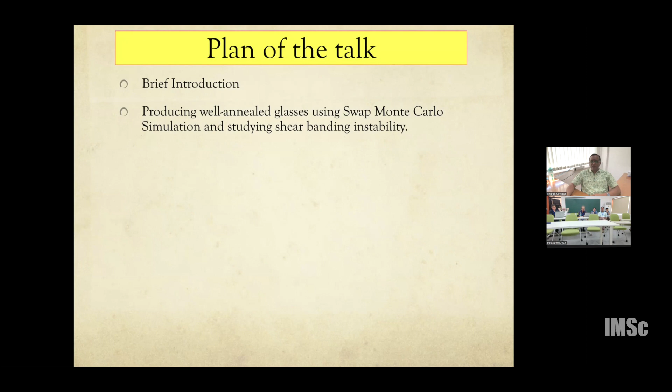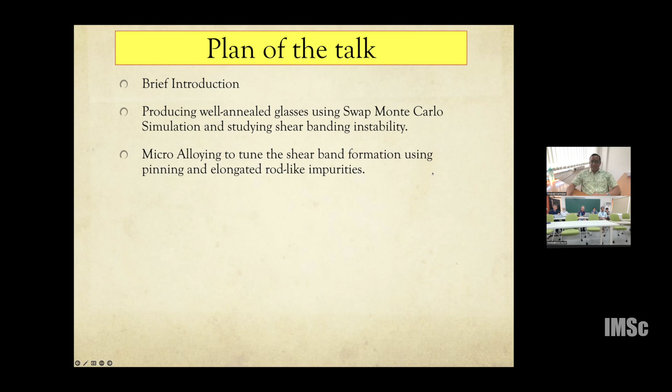I am going to talk briefly about how to produce very well annealed glasses using something called swap Monte Carlo methods, and then talk about shear bands. Next I will discuss how to tune shear bands using microalloying and impurity particles. Then I will talk briefly again about annealing glasses using cyclic shear and what kind of effects it has on yielding processes. The fourth one is along the same line, but using a slightly different technique, a run and tumble active particle. And I will show it has a striking similarity with cyclic shear.

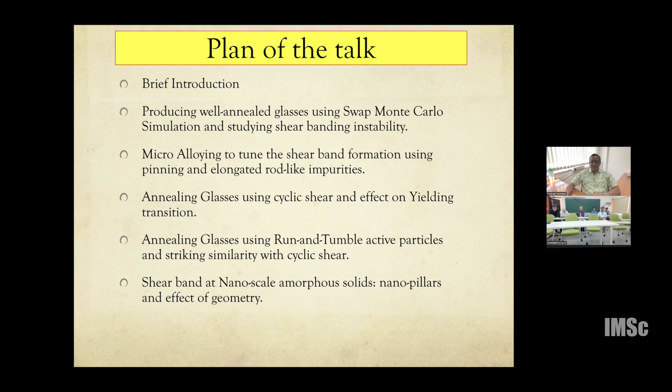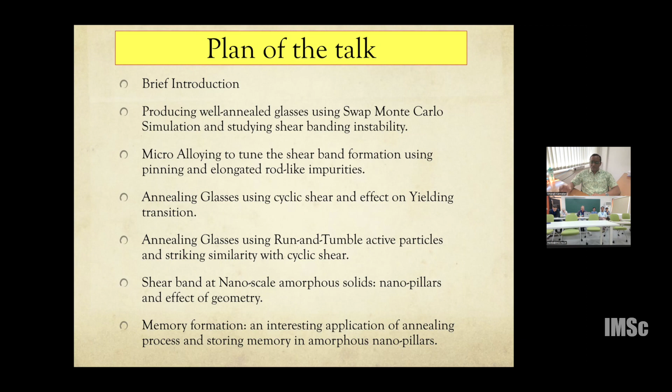And if I have time, then I will go into shear bands at nanoscales, particularly in nanopillars, and talk about how geometry affects them. And again, if I have time, I'll briefly talk about memory formation and how a nanopillar can actually store information. I probably don't have to show you these slides, because I'm sure you have seen them in multiple locations.

But just to briefly tell you that these glasses are there in our everyday life, particularly metallic glass, emulsions, colloids, in paints, ketchup, glaciers, and makeup materials. But what is more interesting nowadays is the use of these materials at small scales, particularly at nanoscale, because of easy processing. At small scales, these materials turn out to be very useful for fabricating various nano devices. And recently there is this micro fuel cell where bulk metallic glass pillars are used, because these pillars have a large surface area, and the catalysis can be significantly large.

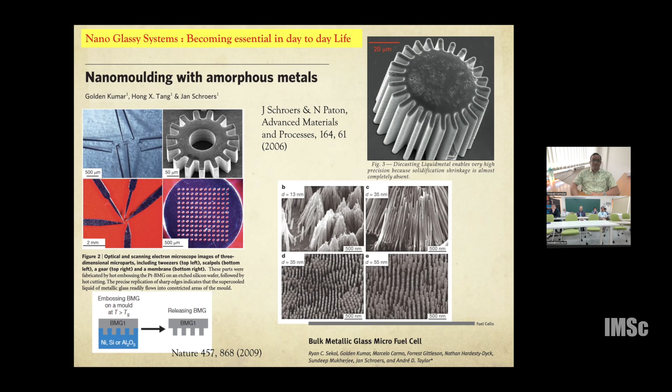But the question that remains is, when you go to such a small scale, do your mechanical properties remain very similar to your bulk, or are there significant changes with size reduction? I'll briefly discuss that aspect and show how geometry plays an important role at small scale. I don't have to really tell you that glasses are one of the strongest materials one can obtain, but they have this major problem of catastrophic failure, known in the physics literature as yielding transitions. Even though we can make very strong materials using glasses and various alloys, how to stop their catastrophic failure is a subject of long debate.

There are also interesting aspects, for example, recently where you try to have a window to see through what is going on in a nuclear reactor. Last December, I went to a center in Kolkata called CGCRI, Central Glass and Ceramic Research Institute, where I saw how they make glasses called radiation sealed windows for nuclear reactors. It's fascinating that glass is one of the best options to seal the radiation and store nuclear waste safely. So there is significant interest in that direction. But there also one needs to understand how to stop such fracture processes, because they will be under extreme conditions.

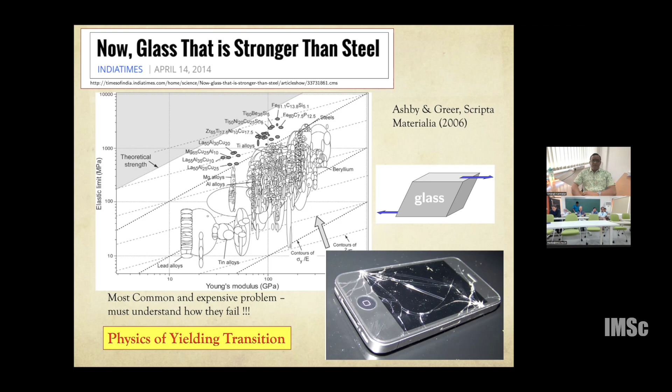Well, why is the problem so hard? I am giving a physicist's perspective. When you try to understand yielding and deformation in crystals, they are controlled by defects. If you study defect dynamics, that can be a good tool to understand crystal plasticity. But in amorphous solids, as the whole structure is disordered, it's very hard to define what a defect is, and then identify and study defect dynamics.

But recently there has been significant progress in that direction, and it is sometimes believed that these SLV structures, which are basically quadrupoles, appear when you apply various types of deformation, be it simple shear, uniaxial or even uniform expansion. But it's not so easy to talk about these objects as non-interacting defects and write down dynamics on them. So there are attempts, and one of them is the famous work on shear transformation zone theory by Langer and co-workers.

And so there is significant progress made along that line, which suggests that these SLVs, if they line up, then they basically produce shear bands, and that leads to crack formations. And it has been shown via energy considerations that SLVs lining up is an energy minimized configuration. This is the work done by one of my collaborators from IIT Bombay, Ratul Dasgupta, with Itamar Procaccia, my former postdoc advisor.

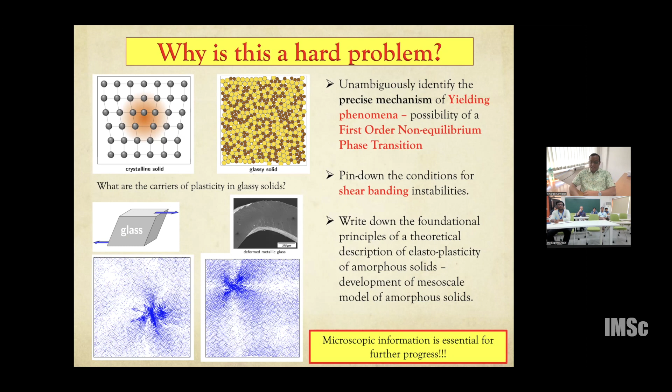And so what is stopping us from getting a very detailed microscopic understanding of this phenomenon is the lack of access to very low energy glassy states. For example, in molecular glasses, you can get a glassy state which is accessible in experiment, where the viscosity can be 10 to the 12 or 13. But you do not get the microscopic details of the arrangements of atoms and their structural information. So some of these can be bypassed if you do experiment, because there you can actually do video microscopy and track individual particles.

But the difficulty comes when you try to access a very large window of relaxation time or viscosity. So in colloidal experiments, the largest viscosity change that you can study is of order 10 to the 4 to 10 to the 5. And when you come to simulations, there also the biggest difficulty is the time scale. So the largest change in viscosity that one can study, if you push it a little bit more, can be 10 to the 5 to 6. So these are very similar to what you can achieve in colloidal experiments.

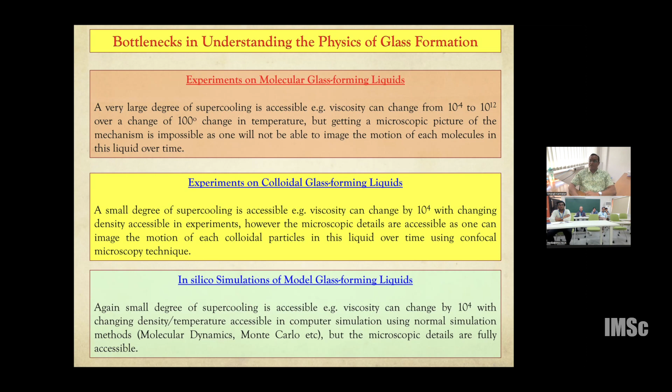But in the last 7-8 years, there has been a significant change in various numerical techniques, and one of them is the swap Monte Carlo technique that I'm going to briefly talk about. This technique was devised at least 10, I think 14 years ago, by Giorgio Parisi and his PhD student Tomás Grigera. What they propose is that you do simple Monte Carlo simulations, but you introduce an additional step of swapping two different particles, and use the same Metropolis algorithm to accept those moves.

And this may sound a very trivial change in the Monte Carlo method, but it turns out this is one of the best ways to speed up the relaxation process. I will show some results soon of just swapping two particles of different types. This will be useful only if you are dealing with systems which are binary or polydisperse. For example, in binary liquids, you can take a big and a small particle and swap their positions.

And one can easily see the difficulty. In a dense environment, a smaller particle can easily be placed in the place of a bigger particle. But the bigger particle cannot be put in the place of a small particle because it is going to overlap with the other particles, so this will be energetically very costly. That's why the moves will be very rare. With binary mixtures, the acceptance rate sometimes goes to 10 to the minus 5 or 6. But surprisingly, even with that small acceptance rate, the dynamics can be sped up significantly.

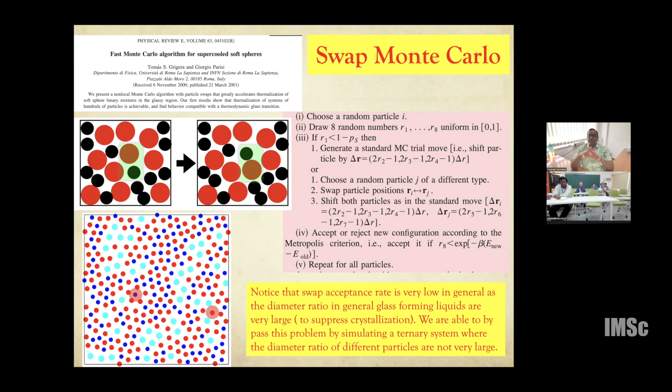So this will enhance your acceptance rate by a significant amount, and one might be able to basically equilibrate the samples much faster. And so I came back to Hyderabad, and some years went by before I actually took it up, and I discussed this with Itamar, who was my first postdoctoral mentor, and we did this work together.

So we actually introduced a ternary model, a ternary glass former, and the model particle size ratios are such that this swap acceptance rate went up by at least a factor of 100. Still the rates are around 10 to the minus 2 to minus 3, but that itself was large enough to accelerate the dynamics very, very significantly.

And we could equilibrate the sample at a temperature where the estimated relaxation time can be as large as 10 to the 10 to 12. So this is nearly impossible using any conventional methods. And I'm saying the estimated time scale because this is the place where you do not have an idea about what should be the relaxation time. If you fit your high temperature data via various forms, the lower estimate turns out to be at least 10 to the 10, which is at least a few fold speed up in the dynamics.

And using that, we looked at various dynamical and static properties, particularly computed the static correlation length, and found for the first time that a static correlation length in this system can grow by at least a factor of 5 or 6, which was impossible to achieve before, and all previous literature data showed static correlation length growing by a factor of 2.

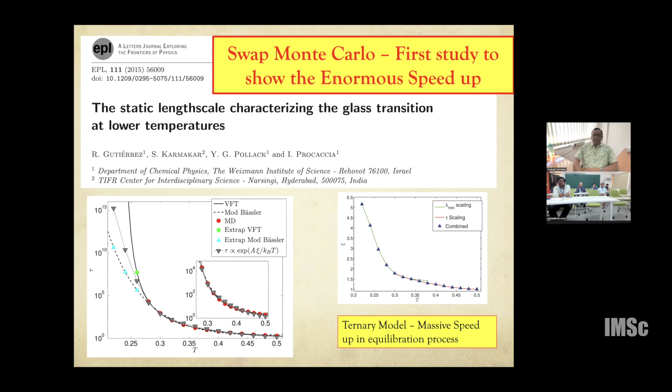So this was a significant advancement in terms of how you can access low energy glassy states, which was later picked up particularly by the group of Ludovic Berthier and his collaborators. So they took polydisperse systems where you have a continuous size distribution, and then they tuned various parameters, including the shape of the distribution itself, and were able to tune the swap efficiency to a scale which is remarkable.

And what people looked at is basically took these glasses, which are called ultra stable glasses, and sheared them. So I'll click the three movies. The extreme left one is for a poorly annealed glass, and you see that there are a lot of plastic events happening in various parts of the sample. The middle panel is a moderately annealed glass, which you can achieve even with simple molecular dynamics simulations. But on the extreme right, you have a well-annealed glass prepared with swap Monte Carlo.

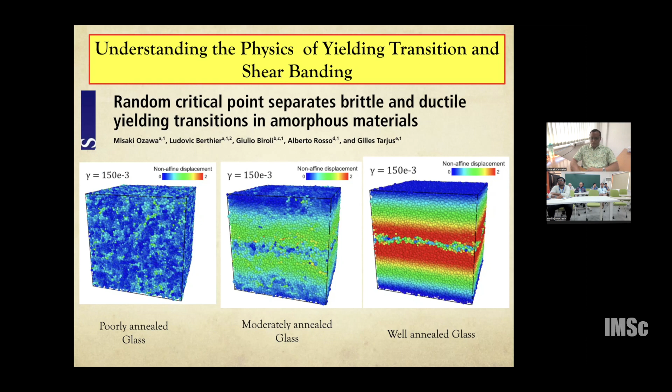So now, even in a computer, one can easily generate shear bands and actually study what leads to such shear band formations. So there are interesting proposals by the same group that this shear banding process in ultra stable glasses is a kind of first order non-equilibrium phase transition, which has been debated a lot in the literature, and it is not clear what it is.

And it's also been claimed that when you change your annealing history, you are basically going through a phase diagram where you have a first order phase transition terminating at a second order critical point, and the physics is claimed to belong to the same universality class as the Ising model in a random field. As I said, these are theoretical developments that have been debated strongly, and there are no clear-cut answers yet.

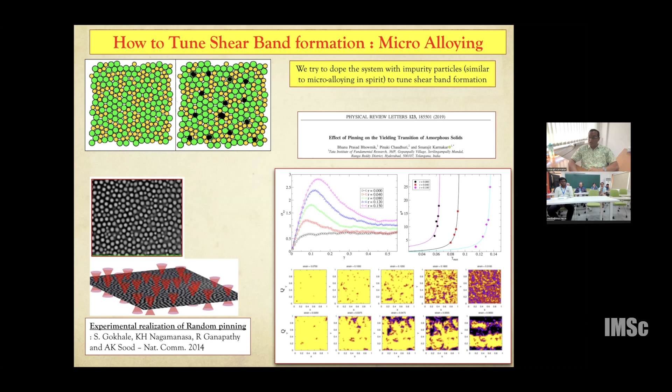So then the next question that we had in mind, how to do microalloying which will be applicable even in, let's say, in experiment, because this kind of random pinning will be impossible to achieve. This is doable in colloidal experiments, but not in molecular experiments. So we propose that if we actually introduce particles which are bigger in size, then these big particles will have relaxation times which are much larger than your host. So they will have much smaller diffusion coefficient than the medium particles. And over a time scale of the medium relaxation time, this particle can behave like a soft pin particle.

So we tried this concept and studied the yielding process in a setup where you introduce particles which are twice the size of your host particle. So this is demonstrated in this figure in the top left corner. So we took basically particles which are of diameter twice, and you just basically change their concentration. We do see that the yield point moves to larger strain, and so it has some pinning-like effect, but it's not fully what you can get in random pinning. But it produces some effects which we feel is a signature of a pinning-like effect.

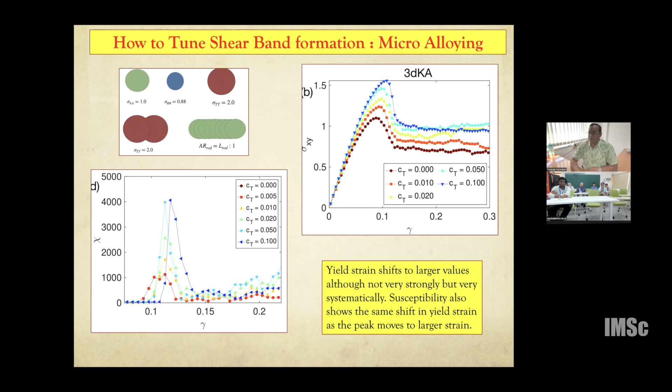And then we went on with the idea, instead of using a large particle, we thought of introducing an elongated particle to see whether they can be better pinning sites, because a long particle will have various dynamical restrictions in terms of both translation and rotation. Particularly in rotation, they won't be able to rotate as freely as a spherical particle. So this is what we looked at in this scenario. We basically took a system and introduced dimers.

And when you increase the dimer concentration, what we see is that when you have zero dimer concentration, then you get the usual stress-strain curve, which is represented by these brown symbols in panel B. And then you gradually increase your dimer concentration, and for large enough dimer concentration, which is around 10%, you see that your material becomes much stronger in terms of enhanced shear modulus, and also the peak position moved significantly. So your yielding has been delayed by a very significant amount. So these systems are able to support loads by a large amount.

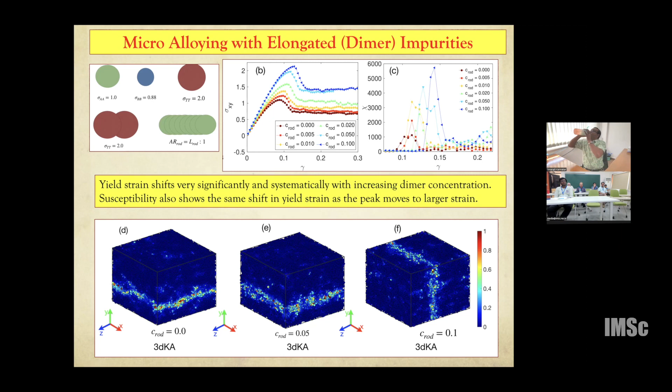And if we compute the susceptibility, it turns out the susceptibility peak increases very rapidly with increasing dimer concentration. So that is signaling some sort of shear band formation. And indeed, when we look at the spatial map in terms of this non-affine displacement, we see that already in the samples you start to have some shear band. But the major achievement in these dimer simulations was that the yield point would be shifted by a significant amount.

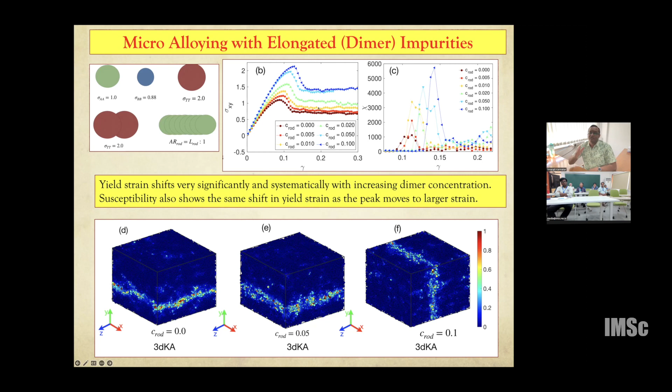Then, just for the sake of theoretical curiosity, what the student did, he stopped the rotational degrees of freedom of these dimers. So the dimers in the simulation can no longer rotate; they are frozen by hand. If you do it and then look at the same stress-strain curve, we see that the stress-strain curve becomes very different. Now the yielding becomes extremely sharp, which is signaled by the susceptibility.

The susceptibility peak went up by at least a factor of 10 to the 4, which is huge, which tells us that the rotational degrees of freedom of these dimers are extremely important for promoting or stopping shear band formation. When they cannot rotate, they somehow localize all the strain to form shear bands, which you can see in this snapshot. When you have some amount of dimers, you have some shear band, but it is somewhat diffuse in the sense that the width is significantly large.

But if you increase the dimer concentration to at least 5% or 10%, then the shear band becomes extremely narrow. And that is also signaled by a very sharp stress drop in panel C, which was supposed to be A, but I have taken it from the paper itself, and it's a cut and paste problem. Sorry for this.

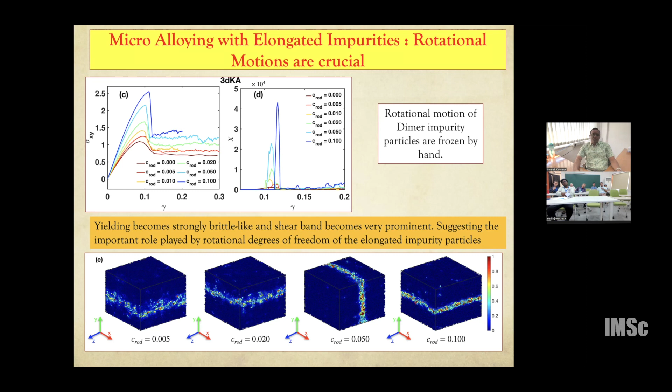So this gave us the crucial hint that if you try to microalloy materials to improve their material properties, particularly the modulus, then these elongated particles can be a good choice, because the modulus increased by a very significant amount. But they also promote shear bands because of their rotational hindrance. In these simulations the rotation was frozen by hand, but in reality, if you need shear bands to be present in your system, you can achieve that by introducing long rods.

So if you increase your impurity rod length systematically, what we found is that you can indeed achieve the same scenario as when you basically freeze the rotational degrees of freedom of the rod particles. A long rod will have very large hindrance for rotation, and they lead to very clean shear band formation. There's a question, Shorjit.

Yes. So the susceptibility is just an overlap function, right? Susceptibility is, yeah, you basically compute the standard deviation of that overlap function. And if you have plus-shaped particles, will it hinder the rotation? If you have that kind of particle, we haven't looked at it, but they may be a good choice because they also have rotational difficulties as well. But whether they will localize the shear band or diffuse it is something which I don't know.

It looks like promoting shear bands in a particular region. But also note that in these snapshots, rods are actually distributed everywhere. It's not that they're all aligned in the shear band, but somehow their presence leads to much sharper shear band formation. Are these shear bands devoid of the elongated rods? No, they are uniformly everywhere. It's not that their concentration increases in the shear band. They are still uniformly distributed in the sample, but somehow shear bands are much thinner.

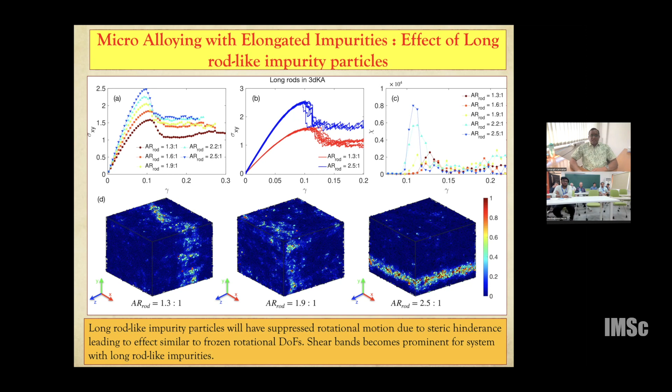Thanks. Yeah. So then we wanted to actually do some structural analysis, and so we took up this work of Hajime Tanaka, who looked at how the particles are packed in various local regions. This is the Tanaka order parameter, which in 2D looks at the angles of your nearby particles and the distance, and then you can compute that order parameter. In 3D, you basically look at the tetrahedrons around the particle.

And when we introduce rods, if you increase the rod length, it turns out the Tanaka order parameter decreases significantly. A smaller value of the order parameter means that you are much more stable. A larger value of the Tanaka order parameter will lead to more disorder in the sample, or basically loose areas. So this rod somehow helped us to achieve something which is very pinning-like. Pinning also makes your sample much more ultra-stable in that sense, or increases the shear modulus. And the rod seems to be doing something very similar.

So we also compared the degree of structural stability compared to ultra-stable glasses. And it seems that these elongated rods and their concentrations can give you a glass whose stability is somewhat comparable to ultra-stable glasses made using swap Monte Carlo. So this is an interesting way to achieve stable glasses, although we could not stop shear bands. Sometimes the shear bands are promoted, but the yielding process is delayed.

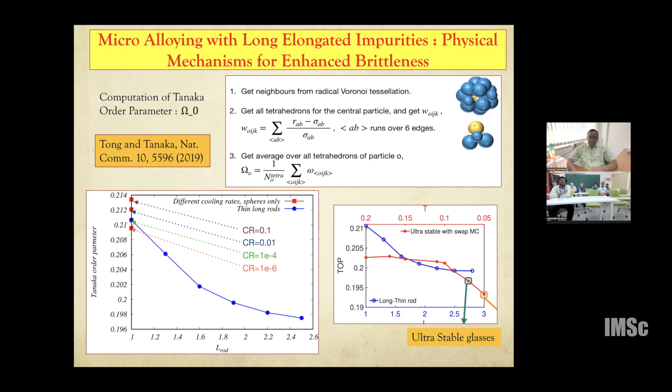So if you then look at the shear band and cut through the profile itself, you see that the order parameter is very large in the shear band region. And interestingly, outside the shear band, the order parameter is much smaller than in your undeformed sample. If you compare the same structural order parameter in the non-banded region, it turned out to be smaller than your undeformed sample, telling us that somehow the non-banded regions became structurally much more stable, which is a surprise for us, and we don't have an answer to it.

And hopefully in future we'll be able to get a good understanding by doing a better structural analysis of both the banded and the non-banded regions, because producing shear bands is now much easier for us in the computer. And we also looked at cooling your sample at a different rate, which is defined by the parent temperature T. If you go to very low temperature and then cool, versus if you take a high temperature liquid and cool, that will give you a different cooling rate in some sense.

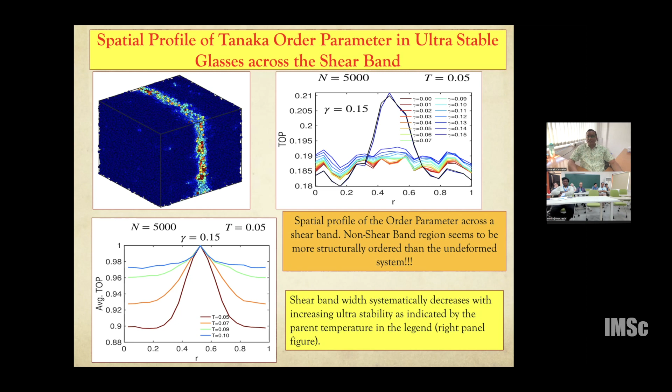If you prepare your glass from a high temperature liquid, then you get a shear band which is much more diffuse. But in a well quenched glass, you will have a shear band which is significantly narrow. And so with this framework, we are planning to study how the shear band width increases as you deform further after the shear band forms. What are the other parameters which control the shear band width? Is there a natural scale that controls the thickness of the shear band? Some of these questions are not clear to us, and hopefully we'll have an answer in the near future.

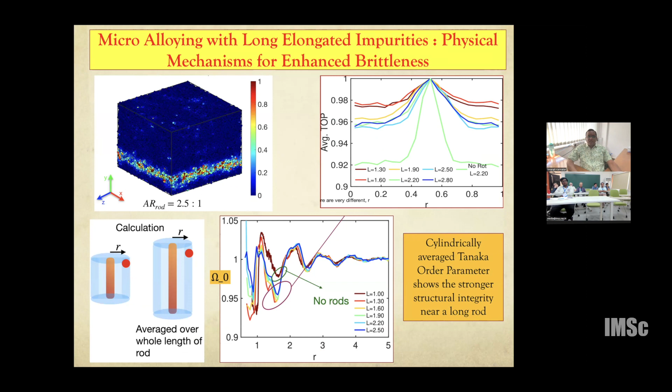So this is a detailed structural analysis of the structure around the rod itself, and I'm going to skip this part. So if we do not have any questions from the previous section, then I want to move into an interesting story of annealing using an oscillatory shear protocol. Okay, so I'm just assuming that there is no question because I have only a few minutes left.

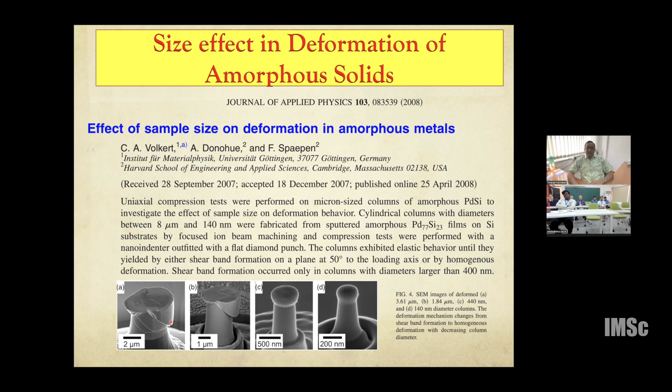And this has been in the literature for quite some time, which says that if you take nano pillars and deform them, then if the pillar diameters are smaller than around 400 nanometers or so, you get deformation which is more homogeneous, like this bulging type phenomena. But if your samples are thicker, then you can get very clean shear bands. And something similar has been shown in this paper as well.

As you go to very, very small nano pillars of metallic glasses and pull them, then you can get shear bands, very, very thin neck formation. So we looked at something similar in our simulations. So these are the pillars which are annealed using active particles, or you can also anneal them by oscillatory shear. And I did not talk about it in detail.

But if you take this system, the aspect ratio is 1. So basically, you have a cubic pillar, and then you pull it, and you see the shear bands are not very clean. But if you take a pillar with aspect ratio 2, height versus the base, then you get a shear band which is much cleaner than the cubic one. But if you take an aspect ratio close to 4, then you get a very clean shear band. And if you look at the corresponding stress strain curve, you see a very sharp drop.

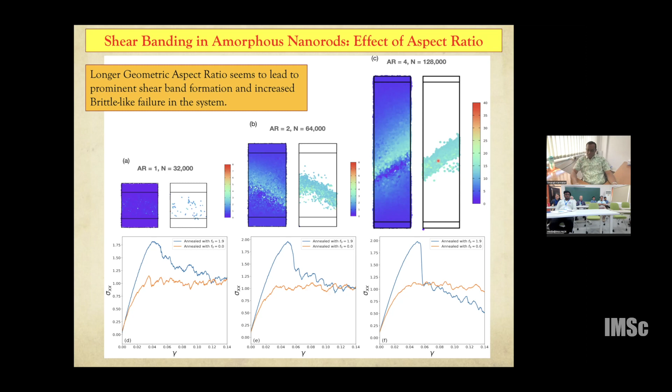So this tells us that a bigger sample but with smaller aspect ratio will have less shear band formation, but a smaller sample with an elongated geometry will have much more shear banding. So that's why when you use pillars for any practical purposes, one has to be careful about their stability, because they can fail catastrophically as well. So maybe I stop here, because I had a couple of slides about memory formation, but I will skip that part because it requires some discussion as well.

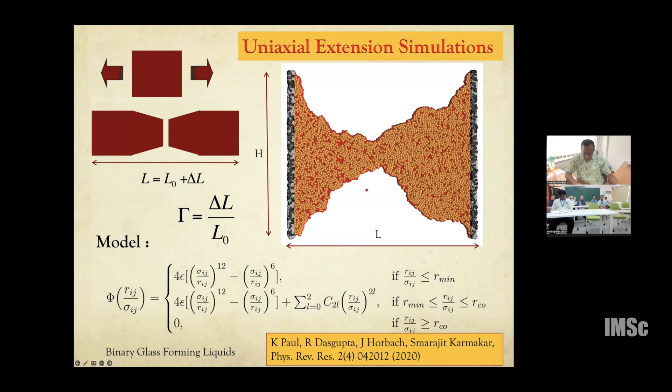So this system that we studied has a yield strain at around 0.07. And we vary the strain amplitude from 0.01, 0.02, 0.03 up to 0.06. And if you go beyond, then you do not get any annealing; you get yield. I'm not talking about annealing. I'm still talking about those energy things that you showed, and the strain. So I'll go back, just show me which one. The oscillatory one in different directions, X, Y. Okay, yeah, I'll just go back.

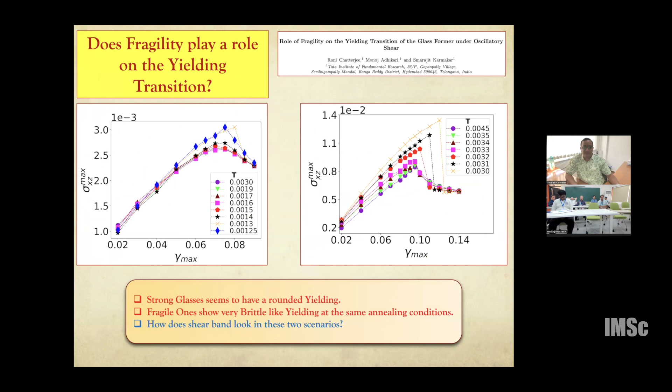Here. Yeah. So what are the strain amplitudes for these energy plots that you are making? So these are all done with I think 0.01 or 0.02 probably. 0.02. And what is the yield point? Again, the yield point is at 0.07 in 2D, and the same model is being studied in 3D, where it was 0.09.

0.07. So what is interesting is this nice plateau appearing. If you basically shear it along one direction, then it saturates there. Then again, if you do it in the other direction, then you again have a cascade of events leading to a new minima. And this minima, this structure continues.

They have this compactification in granular matter. There you can compute changes in volume or increase in density, which seems to show similar 1/n behavior. So we have no answer, no microscopic understanding of it, but this seems to have similar behavior.